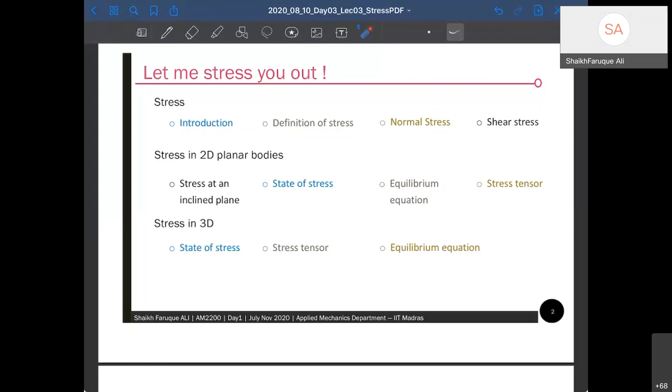So don't assume you'll learn complete stresses in 2 days - it's a progressive thing. You learn something this semester, and you'll learn a little bit more next time when you do solid mechanics, advanced solid mechanics, or maybe finite element. So everywhere you learn a little bit more and add onto your bag of concepts about stresses.

Mechanics of materials is one of the names we use for this course, or the strength of materials. Both suggest you're talking about materials. As a mechanical engineer, we expect you to understand the mechanical behaviors of materials, not the chemical behavior. So more so on the mechanical behavior of material.

A material can have various kinds of behaviors. You already learned in chemistry and physics that the same material can show various kinds of things. We are not dealing with things related to chemistry, like its atomic structure, what it will dissolve in, or at what temperature it will catch fire. Fire is part of mechanics of material, but that's not part of this course. Might be a later part you can take.

What we are dealing with is the strength of the material. That means how much load it can bear, how much load I can put onto the material. Our objective is to design some part of a structure or a machine, maybe an aeroplane structure, a naval structure, or a building structure, or a machine part. Whatever it is, we need to understand how much load we can give.

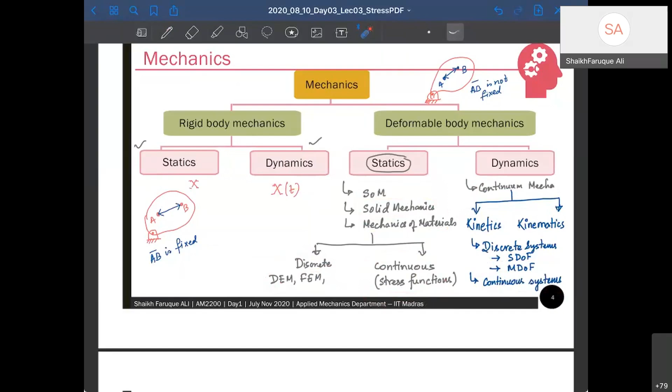Okay, now strength of material involves two terms, one is called strength and the other is material. For example, I'll give you an example. Let's say you have a chalk with you. How difficult is it to break a chalk? It's very easy, right? You don't need a lot of force to break it.

Now let's say you have the same thickness and same size of a steel rod. Can you break it?

You cannot break it, probably none of you can break it with bare hands, right? I have just changed the material, everything else I have kept the same. So with material, the load carrying capacity of the system has changed. There are a lot of behaviors also changed. We'll talk about these behaviors more only after another month, but behavior is also changed. Apart from that, the load carrying capacity also has changed. Therefore, material is important. Let us now take the same size and thickness of a wood.

Will it be easy for you to break? Yes, for some of you it will be easy, you can break it, and some of you may find it a little bit difficult, but finally all of you can probably break it. But it is not as easy as the chalk to be broken, right? So I have given you an example of a chalk or wood of the same dimension, maybe a steel rod or aluminum rod. And you found there is a difference between them in terms of load carrying capacity before failure. One is very easy to fail with your hands, the other, wood, a little bit difficult, but probably you can fail them. But when you come to steel, it's not easy, right?

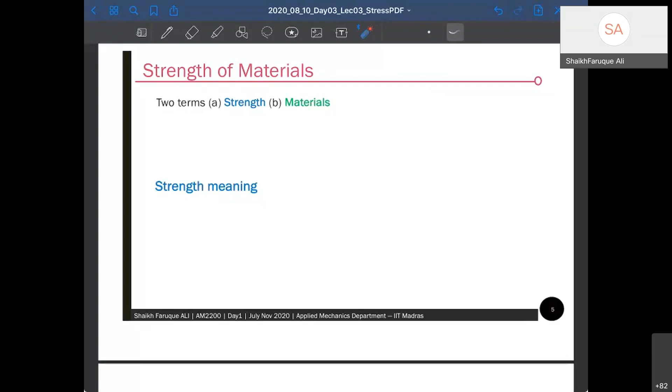Okay, enough talking. So in strength of material, we look at 3 S's: one is called strength, one is called stiffness, the other one is stability. These three are called the 3 pillars of strength of material. Strength is, as I discussed, the load carrying capacity of the material, and it's given in terms of stresses. We don't talk about force so much in strength of material, we talk about sigma, or stress of the material or the structure, which we call strength.

Stiffness is mostly related to deformation or strain, epsilon - these are standard notations for these variables. And then stability, which combines both of them. So these are the 3 things we need to look at: one is strength, meaning how much load carrying capacity it has; one is stiffness, meaning how much deformation it can undergo.

For example, I'll give you one very simple example. Suppose you are going to buy a house, and you go inside the house and you see all the beams, or let's say floor - all the floors are sagging, that means they're bent. So you have this house, and you see the floor is bent like this. Even if an engineer tells you, oh sir, it's okay, you don't have to worry, it will survive - will you buy that house?

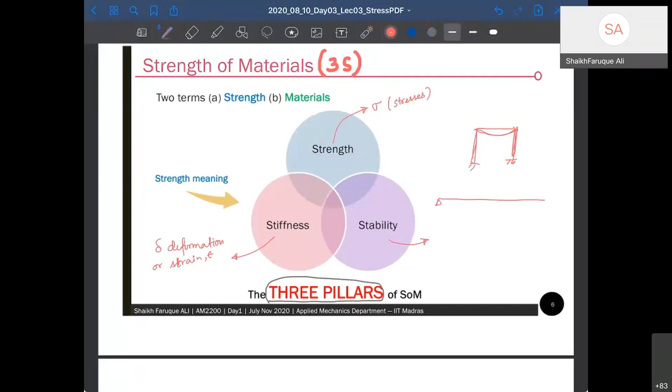Probably not, because it's a psychological factor. Let's say there is a bridge that connects two points of a river, and it's a rope bridge or something. As soon as you stand on the bridge, it starts swinging. Although for years a lot of people have crossed the bridge, if you want to do it for the first time, you will have a lot of psychological fear factor there. Oh my God, I may fall. Because as soon as you put your foot on the bridge, it starts swinging and moving. These are called psychological factors.

These are called deformations or displacements in the structure, and it creates a different kind of feeling in human beings, even if the structure is safe or not. Therefore, there is a restriction on deformations also. Apart from larger deformation, it can break, and there are issues with that, but even then there is a psychological factor even if it doesn't break. So that also has to be part of the limitation.

Then stability. Stability is another factor that is very important. If your structure is not stable, nobody is going to get into that structure. That's very, very true. For example, you have a ladder and you want to go onto the second floor or the roof, and you get onto the ladder. As soon as you put your foot on the ladder, it starts moving to this side. Will you go up? No, you will first check whether it's falling down or not. If it falls down, you will not go up. So stability is also very important.

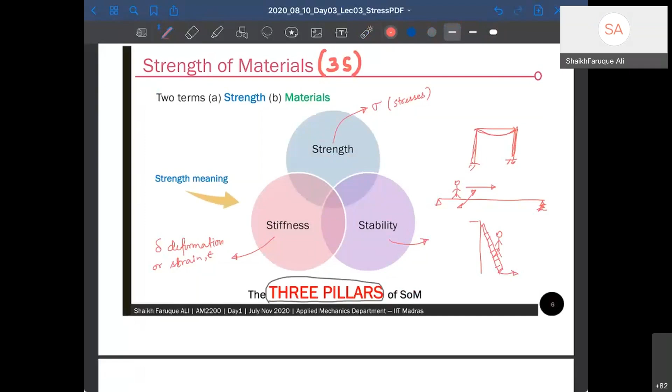All the stiffness, stability, and strength depend definitely on material properties. That's the first thing. If material property changes, everything of this will change.

They also depend on geometry and boundary conditions. When I say geometry, I mean the cross-sectional geometry, whether it's a square, circular, triangular, or a complicated geometry cross-section, whether it's a straight rod or a tapered rod — all this is important. When I say boundary conditions, I'm talking about whether it's fixed, or a simple support, whatever — the boundary conditions are important. So these three things, whenever we talk about a structure, should first come to your mind.

What material is it talking about? Okay, it's aluminum, it's steel, it's wood, or it's a composite. Then you should look into geometry — is the cross section a square, a rectangular, a straight beam, or a tapered beam. If it's a rod, what kind of rod — circular rod or a square rod? Then, what are the boundary conditions? These are the few things that should come immediately to your mind given a design problem.

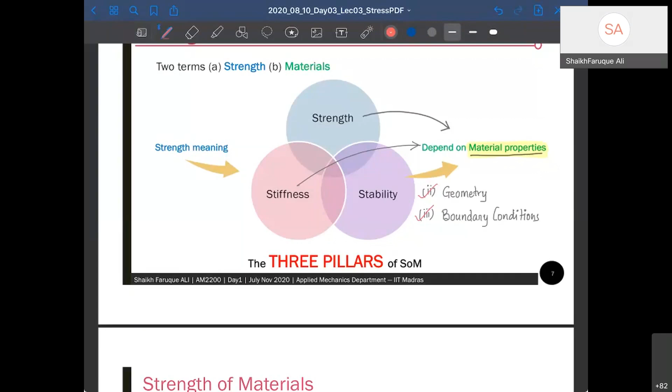When we talk about strength of materials, a material has following processes in mechanics. What we deal with are the mechanical properties and theory. So many of the mechanical properties we learn in our strength of materials experimental labs, and theory is what you learn here — a part of it, not fully, but it's the starting of discussion. A few more discussions are here.

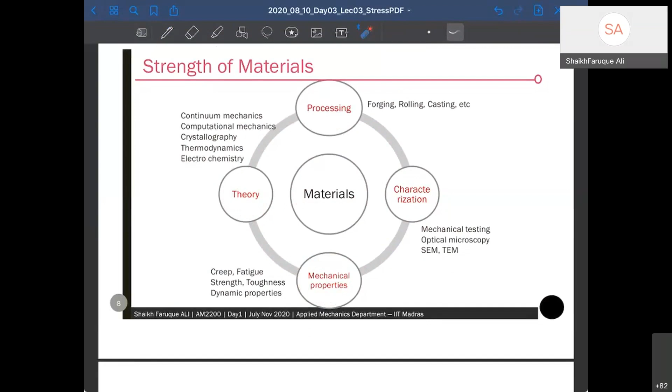We will mostly solve our problems for bars. Remember, these examples will be shafts, which take torsion, then beams, and finally columns for stability. These are our applications of what we theoretically learn.

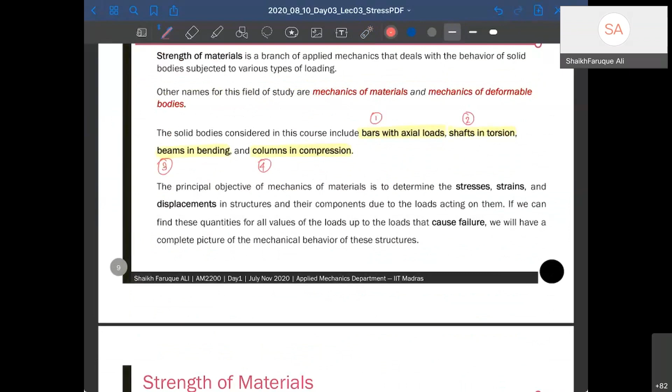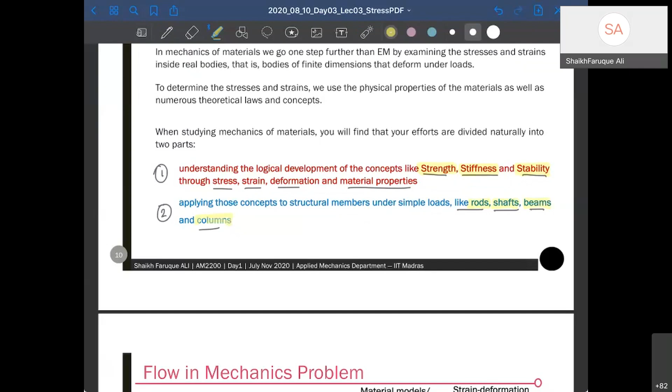Okay, so the full course development will be understanding the logical development of concepts like strength, stiffness, and stability, through stress, strain, deformation, and material properties. An application of those concepts to rods, shafts, beams, and columns. This is what the course is.

Okay, flow in mechanics. We talked about what we are going to deal with in mechanics: 3 S's - strength, stiffness, and stability. All these three depend on material properties. It depends on what these material properties are, which we'll discuss in a few classes. It depends on geometry and boundary conditions. So how do these things come up? How do you relate them?

We all see that when we have a structure, we see the load coming to a structure, and finally we say there is some deformation. Suppose you take a scale, a ruler. You hold one side and put a point load on the other side, a finger with some load. You will see the material scale will deform slightly.

So these are the two visual things you can see: one is the point of application of the load - you may not see the amplitude or magnitude unless you put a sensor there - and visually you can see a deformation, though you cannot measure it unless you put a measurement device. But these two are roughly the visible things. But what happens in between?

So, external load that you can see in the structure becomes internal forces that you have understood - BMD, SFD, and internal forces. Those internal forces give rise to something called stress. Stress does not depend on external load, it depends on internal load. And that stress gives rise to something called strain in the material. And the strain gives rise to something called deformation.

Therefore, there are two ticks here - these are what you can see. You can also measure strain from deformation by back calculation, using strain gauges that are used to measure strain. So that gives strain as an output, but still it is based on deformation.

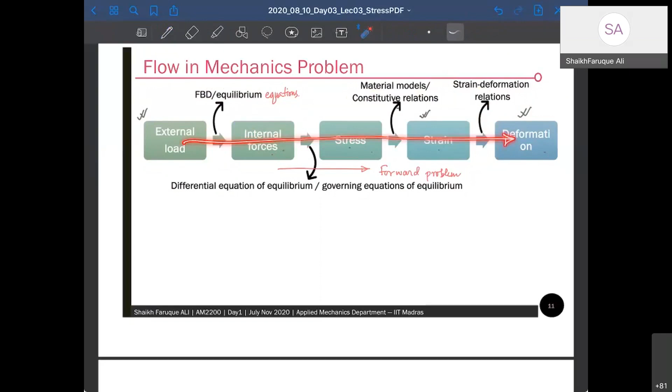So this is called a forward problem, from force to deformation. Similarly, you have something called an inverse problem, which is from deformation to the force - here we move from deformation to strain, strain to stress, stress to internal force, to external force. This is the inverse problem. So you calculate deformation on the body, and from that deformation you try to understand what kind of external forces is acting on the body.

So this is a little bit complicated because of a lot of steps in between, and these are not one-to-one relationships, and therefore there can be a lot of external loads that can give rise to the same deformation. So the forward problem is easy, but the inverse problem is not easy, except for a few simple problems.

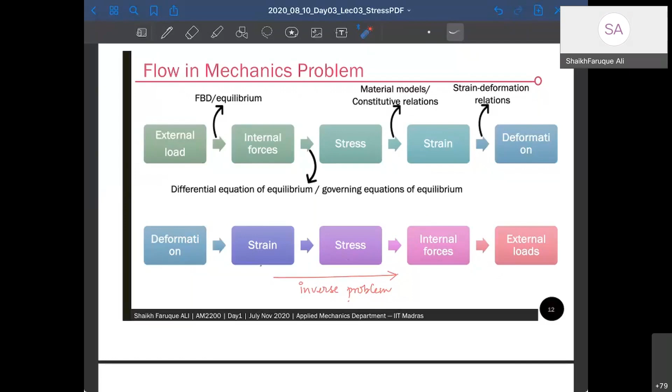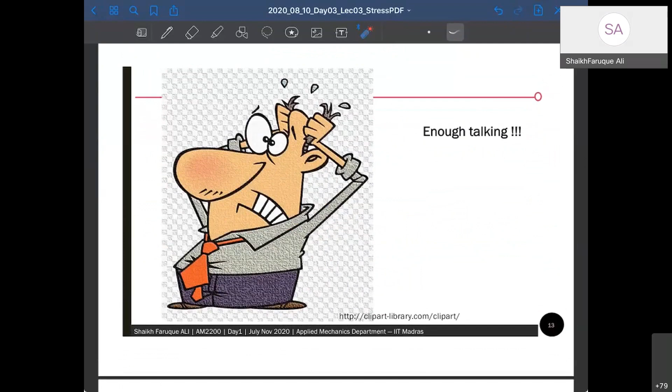Enough of talking, we just discussed a few things. I will try to stop here because I will not define stress today again. I will talk about stresses in the next class, because let it be fresh in your mind. If you are stressed - let us, this photo has been taken from the internet - let us stop here.